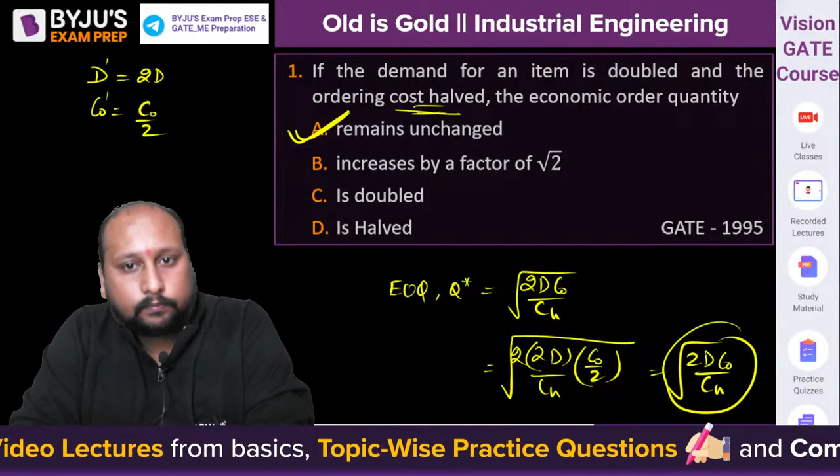It is being written that the ordering cost is being halved, so C0 by 2. Clear? Right, let's move to the next question, question number 2 on the screen.

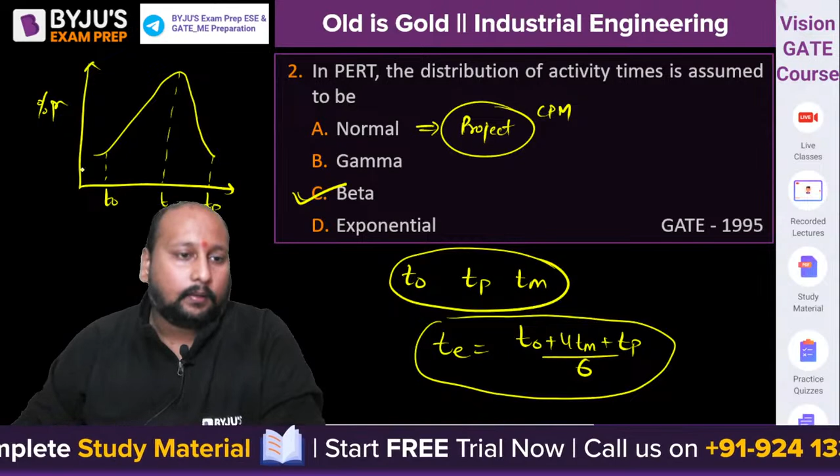Let's move to question number 3 on the screen. A very easy question from your work study module. A stopwatch time study on an operator with a performance rating of 120. So the performance rating or rating factor is given as

1.2. Okay, observed time is basically 2 minutes. That means your observed time is 2 minutes. So allowance is given as 10%, then what is the standard time? What is the standard time?

Very easy question. Calculate the normal time. We know how we can calculate normal time. Normal time is equal to observed time into rating factor, right? We can say normal time is equal to observed time into rating factor. What is observed? 2 into 1.2, that is equal to 2.4.

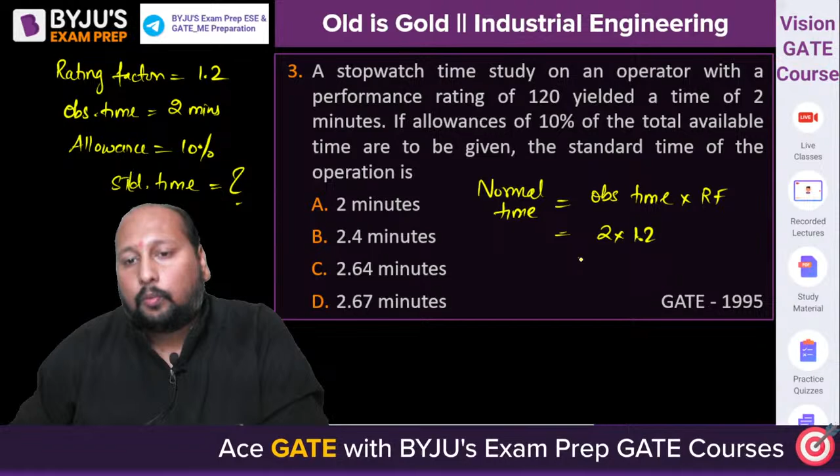Right, now they are asking you the standard time. How can we calculate the standard time? Anyone? Standard time, very good.

Money is going with option B. But 2.4 is the normal time, they are asking the standard time. Standard time is equal to normal time plus 10%, because allowance is 10% of normal time.

So this is equal to 1.1 into normal time, right? So normal time you calculated as how much? 2.4. So standard time is equal to 1.1 into normal time, which is 2.4. So what will this be? 2.4 plus this will be 2.64 minutes.

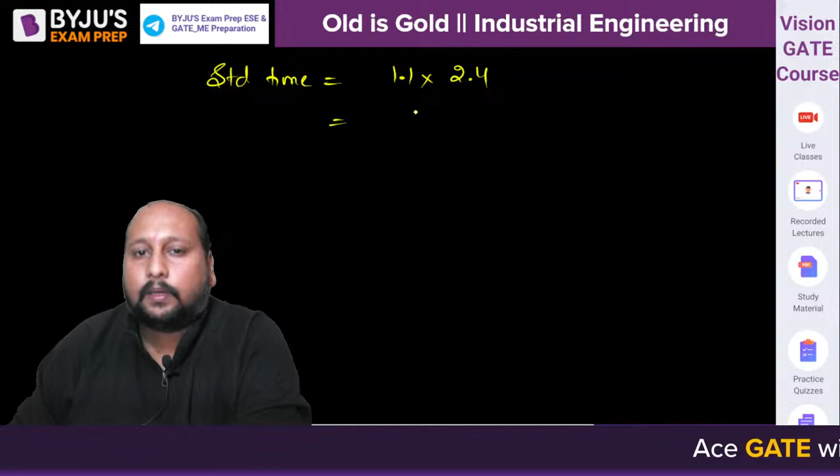2.64 minutes, are we getting 2.64? Option C, very good, Tarini and Money. Absolutely correct. Option C is correct answer.

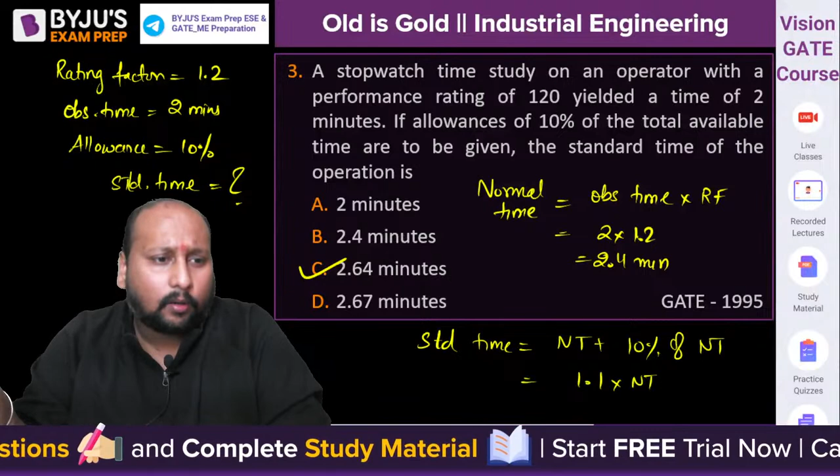Let's move to question number 4 on the screen. From assembly line balancing - in an assembly line balancing of toys, 5 workers are assigned which take times of 10, 8, 6, 9 and 10 minutes respectively. What is the balance delay for the assembly line? Tell me, what is the balance delay for this line?

Option A is 43.5, and they're asking percentage. Okay, quickly - assembly line balancing, cycle time, total work content, remember the formulation: efficiency, 1 minus efficiency is balance delay.

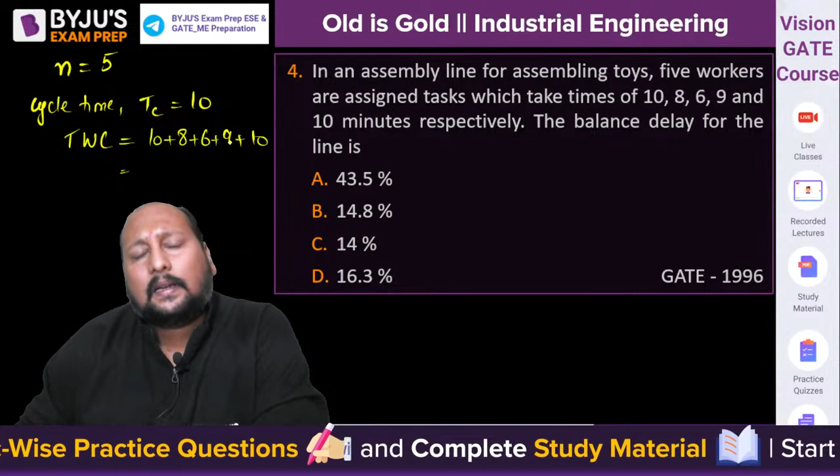Total work content is equal to 10 plus 8 plus 6 plus 9 plus 10. What will this be? 18, 24 plus 9, 33, 43. Okay, 43.

So now we can say the balance delay is equal to 1 minus total work content divided by n into cycle time. So 1 minus 43 divided by 5 into 10, that is 1 minus 43 by 50, which is 0.86. So 1 minus 0.86 is 0.14. Option C, are you getting 14 percentage?

You have to multiply with 100 also, right, because they're asking percentage. So are we getting 14 percentage, everyone? Option C, 14 percentage is the final correct answer. 0.14 comes, so that is 14 percentage, option C. Clear? Very good, very good. Perfect, okay, so always remember that.

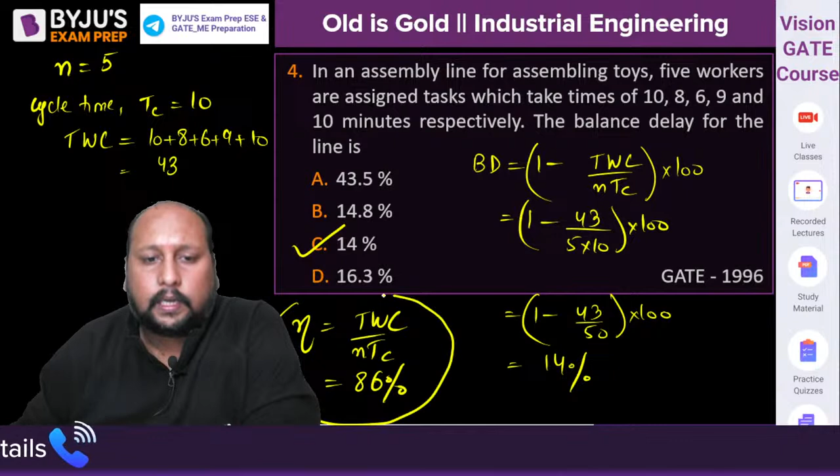And if in the same question they're asking you what is the efficiency, then efficiency is equal to total work content divided by n into TC. That is equal to 86 percentage. Okay? If in examination they ask you the efficiency, you can directly calculate using this particular formulation.

So I always tell you, industrial engineering is a scoring subject, that is my humble request. There are some set of subjects that you need to cover in order to score more by less effort. Which subjects? Heat transfer, industrial engineering, mechanics - 3 subjects, very easy, small subjects, easily able to cover.

Next question. This is from work sampling. Basically initially work sampling was also included in your GATE syllabus, but recently, if I talk about after 2017, they are not asking it. But you never know, if ESE includes it, that is the reason I have taken up this problem.

So they're saying that a preliminary work sampling study shows that the machine was idle 25% of the time based on a sample of 100 observations. The number of observations needed for a confidence level of 95% for an accuracy of plus minus 5% is. Let's calculate. Now here you need to have some understanding of how to calculate the number of observations.

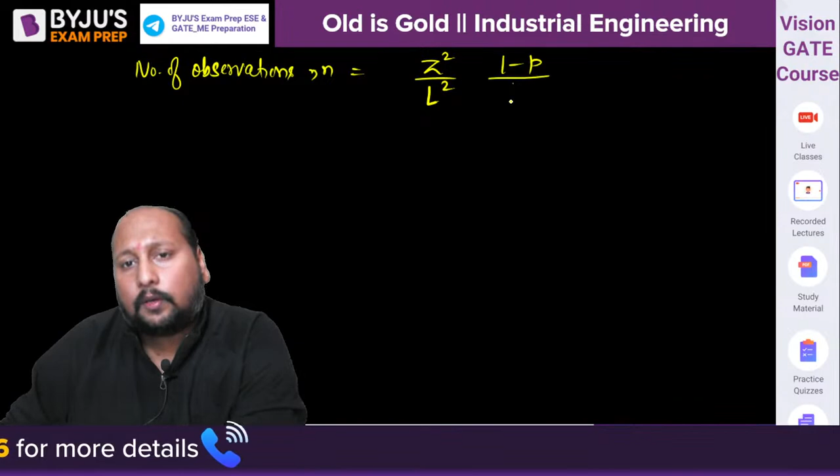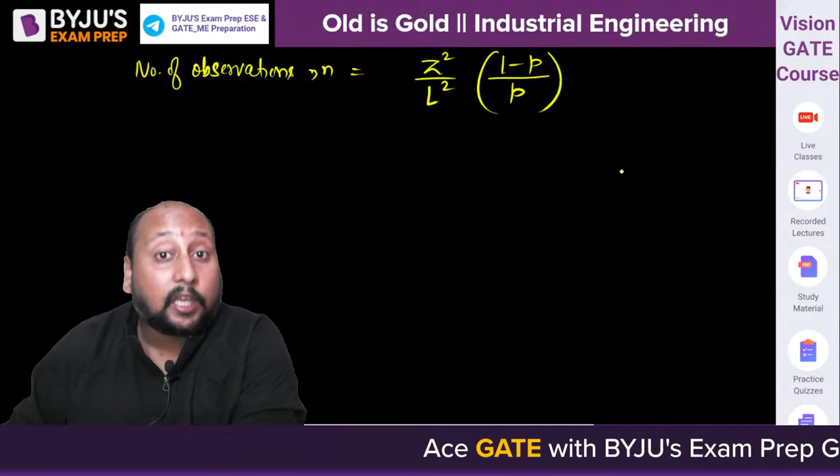I hope everyone knows. If not, you can tell me. Number of observations, how can you calculate? Number of observation for any work sampling is equal to standard normal variate z square divided by accuracy limit L square, times 1 minus fraction of occurrence p, divided by p. Here z is the standard normal variate constant, L is the limit of accuracy, p is the fraction of occurrence. Now here the fraction of occurrence is equal to how much?

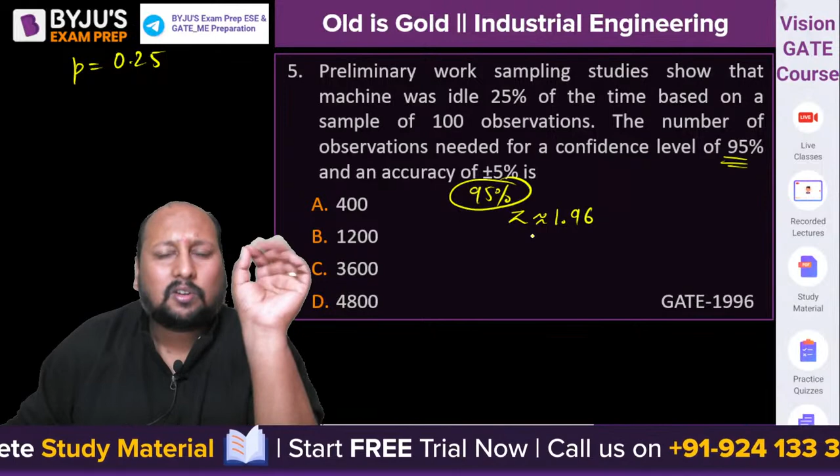25%, that is 0.25. Now for a 95% confidence level, which value of z do we have? We know that z is approximately equal to 1.96. When the confidence level is 95%, the z value is equal to 1.96. Let us take it as approximately 2, because 1.96 we can take as 2, since they are giving the values in integers, right? So we can approximately take it as 2.

L is equal to plus minus 5%, that is 0.05 value. So now we can say this is equal to z is equal to 2 divided by 0.05 whole square, times 1 minus 0.25 divided by 0.25. Can you calculate and tell me what is the nearest value we are getting?

2 divided by 0.05 whole square, 0.75 divided by 0.25. Are you getting exactly 4800? That means to get this kind of accuracy at 95% confidence level, that is your standard normal variate, we need to take 4800 number of observations in the work sampling procedure.

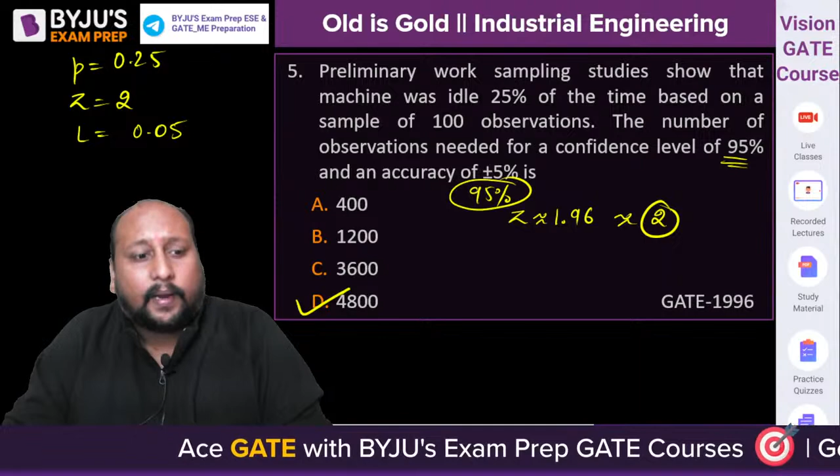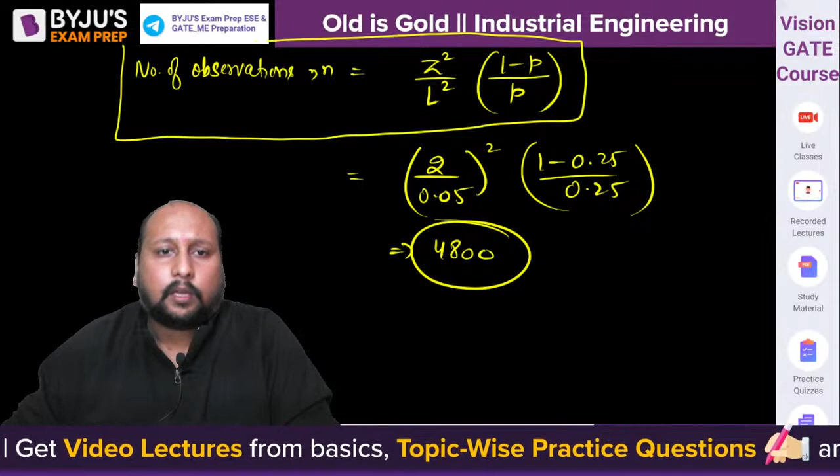GATE used to ask this before, recently in the last 5 years they have not asked, so that might be the reason you won't be able to recall this formula, because we don't frequently use this formulation. So number of observation is equal to z square by L square times 1 minus p upon p. You can use this if they are asking, but okay, you can have a discussion.

So the next question - this type of question is being asked. Now this was a 5 marks problem because earlier GATE had conventional problems, so this is a 5 marks question. A job shop incurs a cost of 60 rupees per day for each day a job is in the shop. At the beginning of the month, there are 5 jobs in the shop with the following data. The processing time and the due date is being given. Which schedule will minimize the total cost? Tell me in which case you'll be having the minimum job flow time.

Minimum job flow time will be observed in which rule, SPT or EDD? If you want minimum total cost, your job flow time should be minimum. SPT will give you the minimum job flow time, and minimum job flow time will definitely result in minimum total cost. So they're not specifying which method to apply, but they've mentioned which schedule will minimize the total cost. That means your answer is SPT rule.

So now we understand SPT rule has to be applied. Now the question is, what is that total minimum cost? Let's try to have a sequence. Quickly tell me what will be the sequence that we'll be getting by using SPT rule.

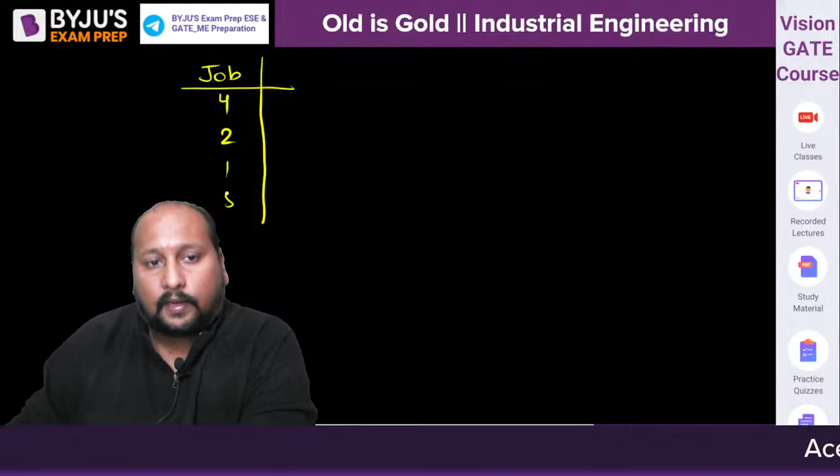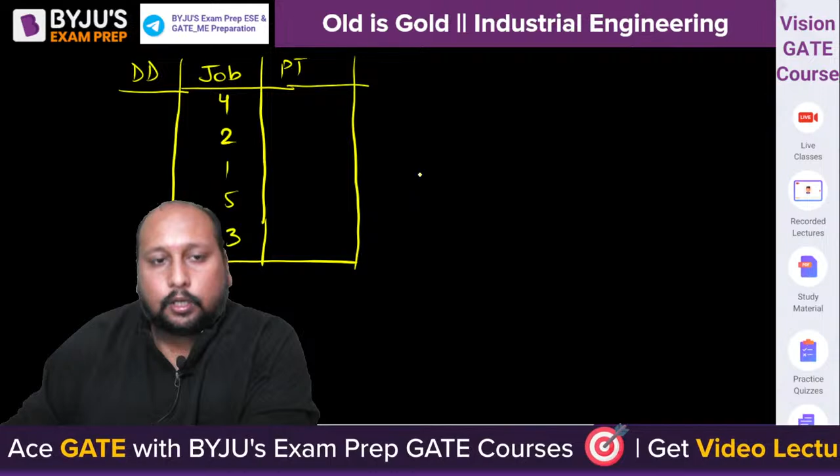Let me write the due date and the processing time along with the number of jobs. Job number 4: 2 and 9. Job number 2: 3 and 12. Job number 1: 5 and 10. Job number 5: 6 and 8. And job number 3: 8 and 20.

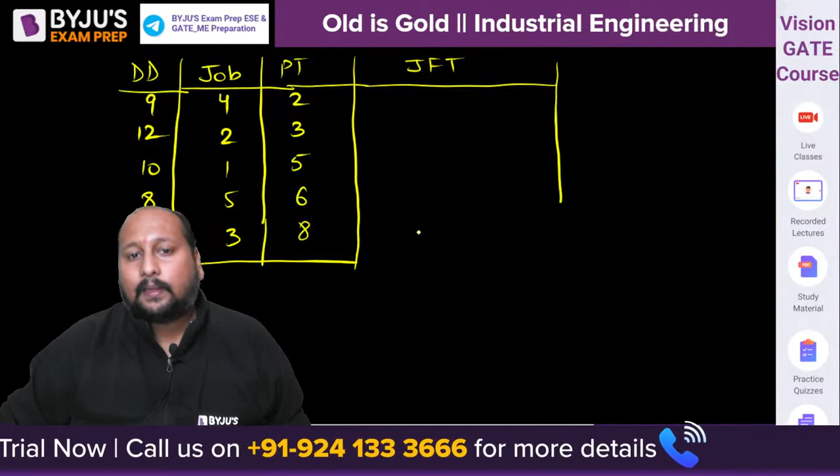So quickly tell me what will be the job flow time for these activities. After that we'll calculate the tardiness or lateness, because they're asking for the tardiness also.

Okay, so we're starting from 0. 0 plus 2 equals 2. 2 plus 3 equals 5. 5 plus 5 equals 10. 10 plus 6 equals 16. And 16 plus 8 equals 24. So tell me, what is the total job flow time? 2 plus 5 is 7, plus 10 is 17, plus 16 is 33, and 33 plus this one will be 57. Are we getting total job flow time as 57?

Now tell me which of the jobs are tardy jobs. Let's start with job number 4, the first one. Is it a tardy job? It is supposed to be completed in 9 days, we are completing in 2 days, not a tardy job. Job 2 is supposed to be completed in 12 days, we complete in 5 days, not a tardy job. Job 1 is supposed to be completed in 10 days, we finish in 10 days, exactly on time, not a tardy job.

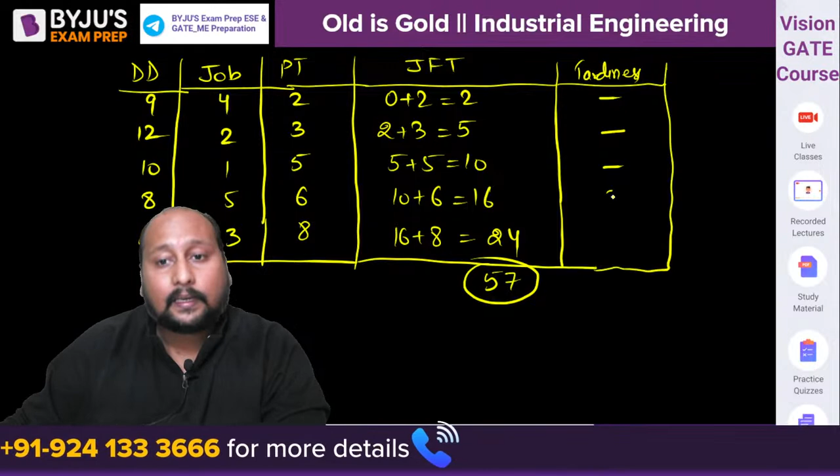Now job number 5 is supposed to be completed in 8 days, but we are completing in 16 days. We have a tardiness of 16 minus 8, that is 8. Next, job number 3 is supposed to be completed in 20 days and we are completing in 24, so 24 minus 20, that is 4. So there are two tardy jobs, job number 5 and job number 3.

So what was asked in the question? What is the total minimum cost? We can say the total cost will be equal to 57, because these are 57 number of days, and per day we have 60 rupees. So 57 into 60 will give you the total minimum cost, which is 3420 rupees.

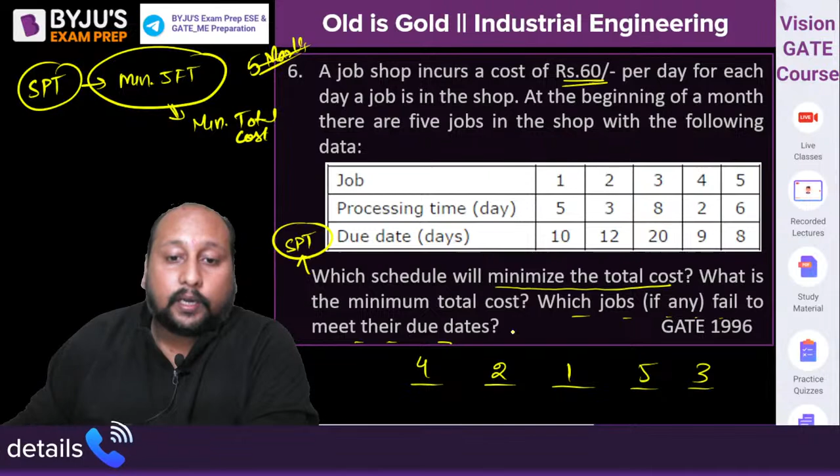Now the second part is, which jobs, if any, fail to meet their due dates? The answer is job number 5 and job number 3. These are the two jobs which are not able to meet their due dates, the rest of the jobs are able to meet their due dates. They're not asking total time, they're only asking which jobs, so you can say 3 and 5.

If they ask for the total tardiness, then we can say 8 plus 4 equals 12, that will be the total tardiness, if they ask in future. If they ask, what will be the average tardiness for this? Anyone?

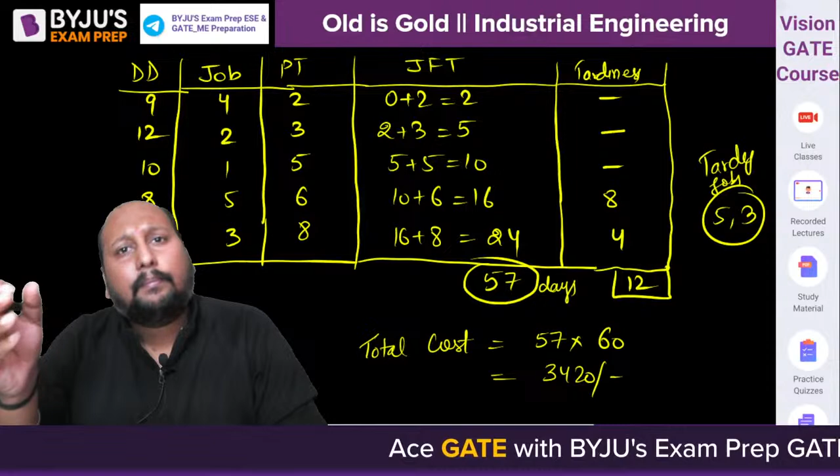What will be average tardiness? That will be the total tardiness divided by the number of jobs. So it will be 12 divided by 5, that is 2.4, which will be the average or mean tardiness. Clear? 2.4. Very good, Rohan.

Next question on the screen. A simple 5 marks conventional problem was asked in the examination. Okay, next question on the screen. Question number 7, very easy.

There's some confusion for many people here, let's try to clarify. Most commonly used criteria for measuring the forecast error. Which of the following criteria do we use to calculate the forecast error? Is it mean absolute deviation, mean absolute percentage of error, or mean square error? Mean standard error isn't even a real thing, so that's eliminated. Okay, anyone else? Which is the most commonly used criteria for measuring the forecast error?

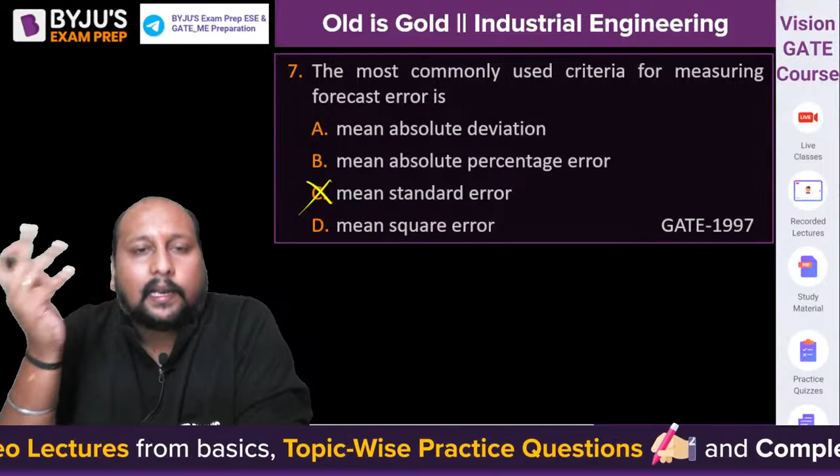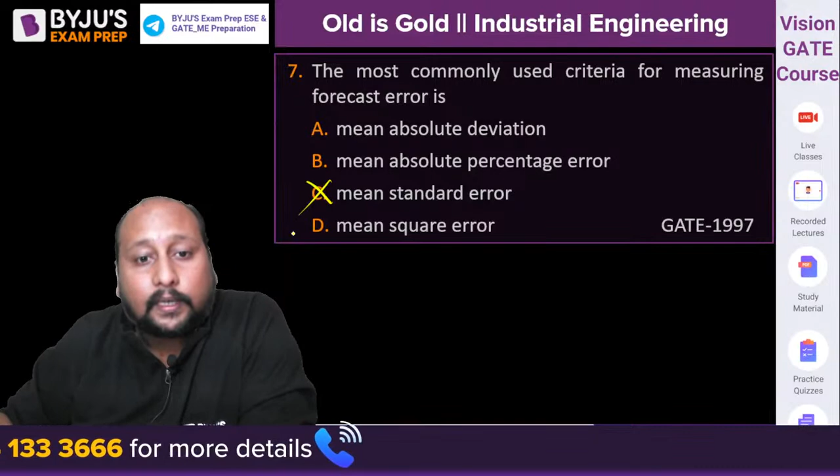There's a bit of confusion here because we study mean absolute deviation as the most common forecast error, but that's not the real scenario. In real life analysis, we always try to calculate the standard deviation. Always remember, whenever you want to calculate the fluctuations in any problem, from a generalized perspective, we always calculate the standard deviation. Which parameter helps us calculate the standard deviation? That is nothing but, very good Tarani, option D, mean square error. Because mean square error helps us calculate the standard deviation, or the fluctuations or uncertainty that will be there.

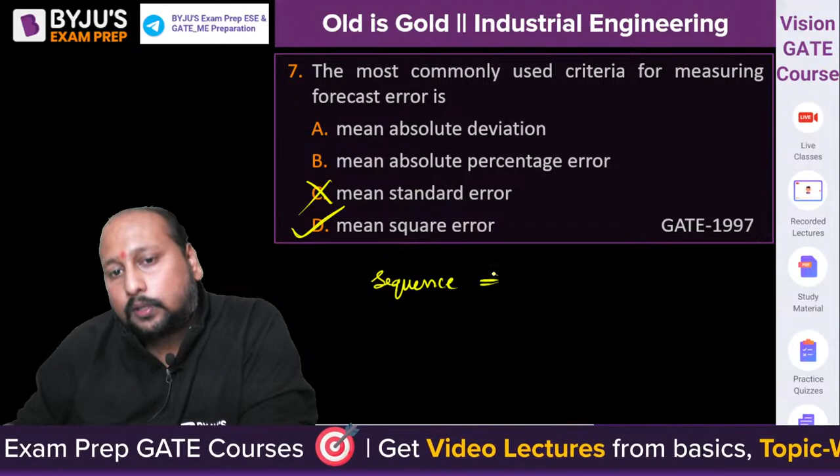So if I want to say what should be the sequence of importance of error, let me tell you, because this will help you going forward. The sequence that should be used: first important is mean square error, then we can go for mean absolute deviation, then mean forecast error, also known as bias. Last one is mean absolute percentage of error. This mean standard error, we can say, is basically talking about bias only. Clear? Option D is the correct answer. Very good, done, next question.

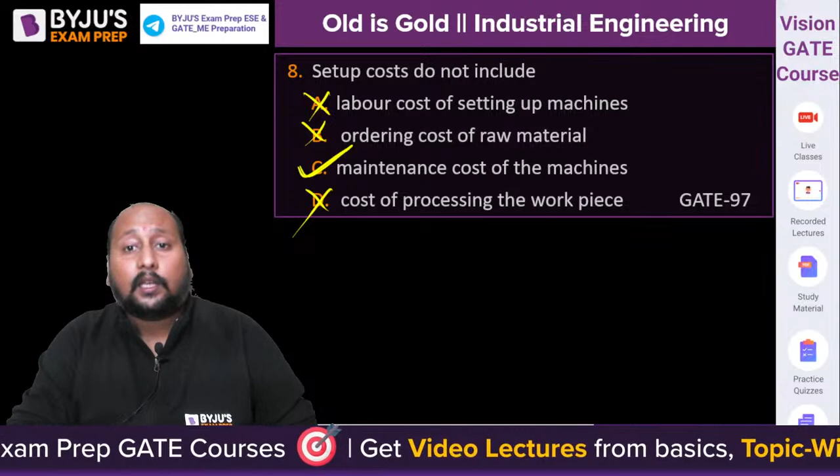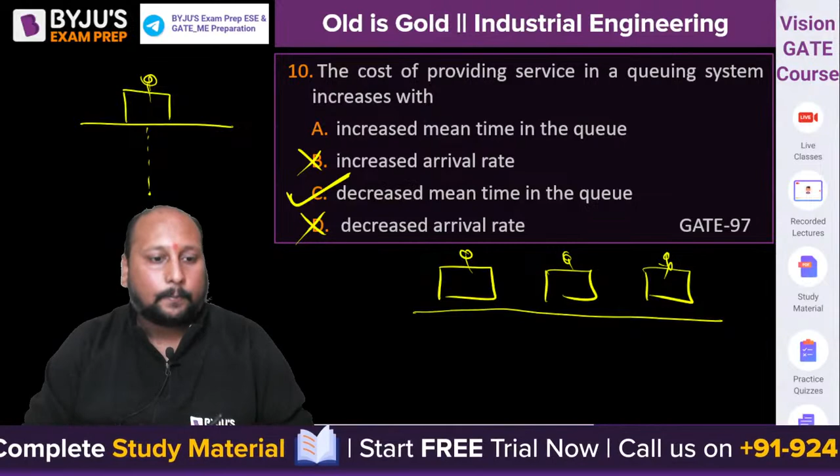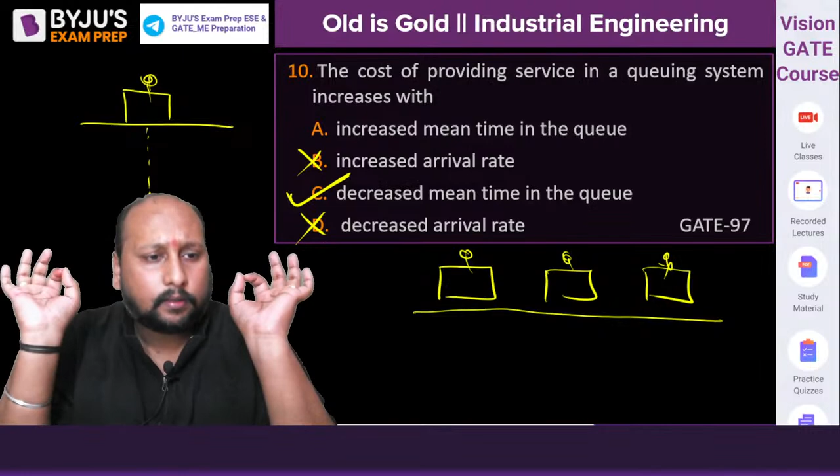Okay, option C is the correct answer. Is this clear? The cost of providing service - let us suppose you are hiring three executives, so definitely the cost of providing service has increased, so the time spent in the queue will be decreasing. Clear? Understood? Look at it from the logic perspective, try to understand the logical perspective, you'll be able to answer these simple questions.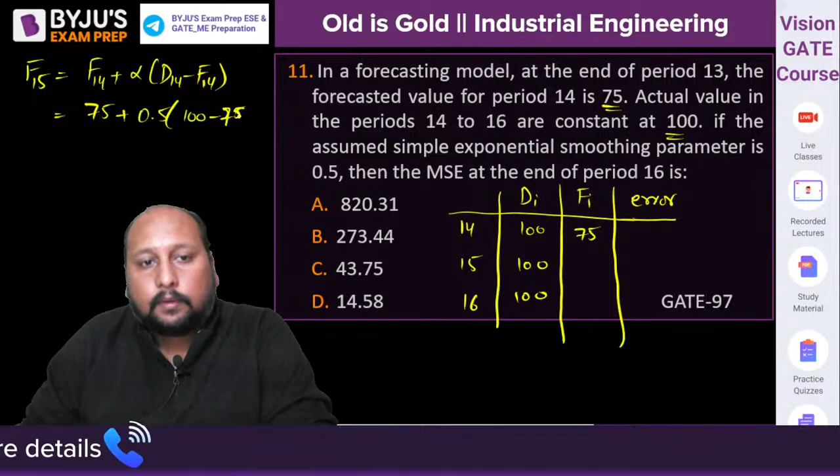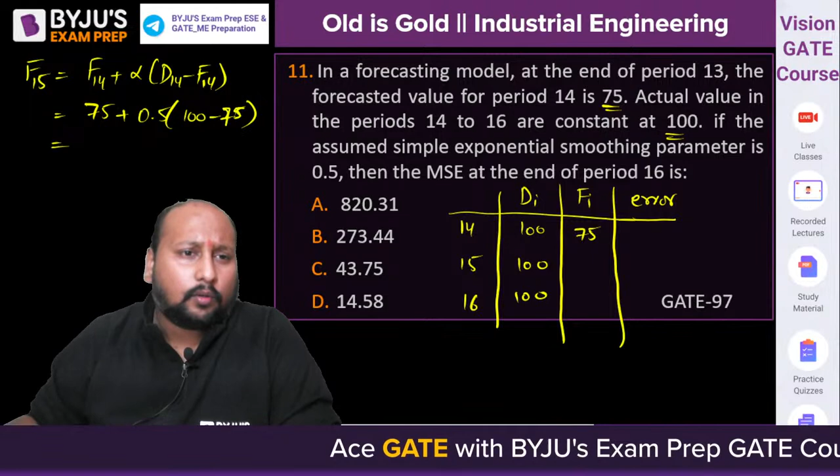So that is coming out to be how much? Help me out with the values. 25 into 0.5 that will be 12.5. So plus 75, that will be 87.5. So we'll be getting over here as

87.5. Next value F16, I'm directly writing the value 87.5 plus 0.5 into 100 minus 87.5. How much is coming? 100 minus answer into 0.5 plus 87.5 equals 93.75. Very good.

93.75. Now let's try to calculate the error. What is error? D minus F, DI minus FI. So 100 minus 75 is 25. This is 12.5, right, 12.5. This is how much?

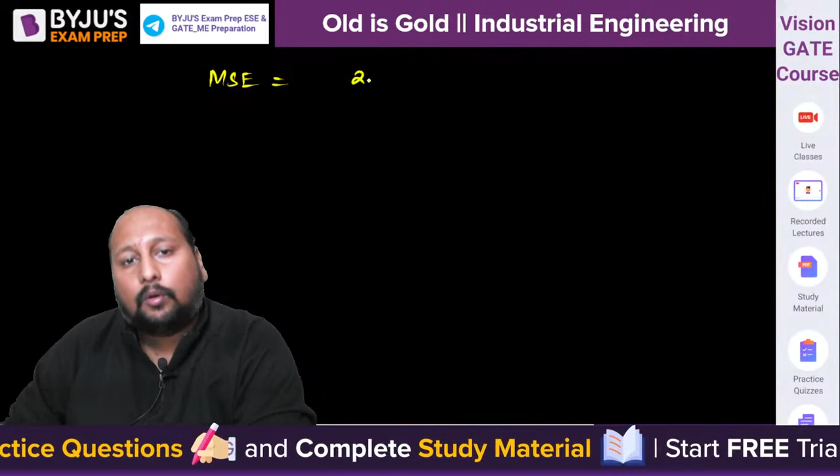6.25. Perfect. What do we need to do for mean square error? Just we have to take the square and take the mean of this. So mean square error will be equal to 25 square plus 12.5 square plus

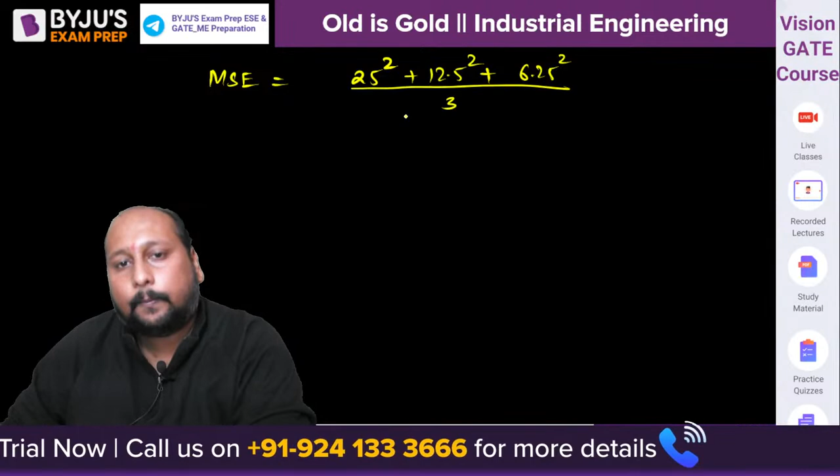6.25 square by 3. What is the value you are getting? Tell me in the comment section what is the final value. Out of A, B, C and D, which is the correct answer? B, sure.

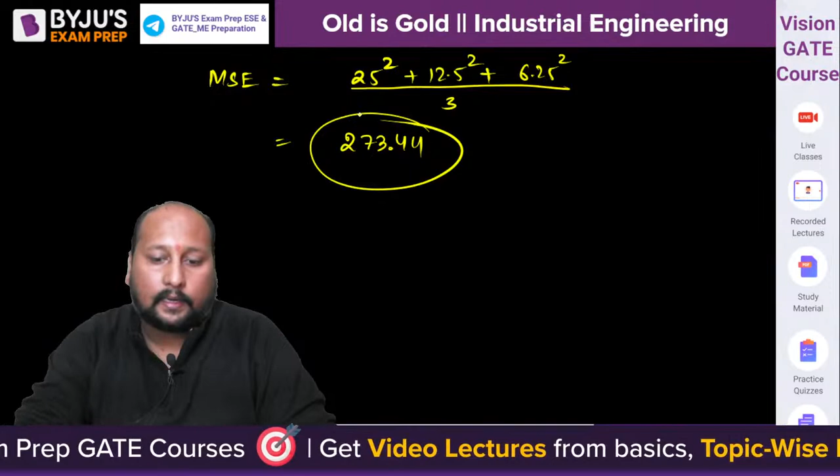273.44, very good. 273.44 is the final correct answer. Very good, right? Option B, 273.44 is the final correct answer. B is the correct answer. Very good, Arnab, Rohan, Tarini, Mani, very good.

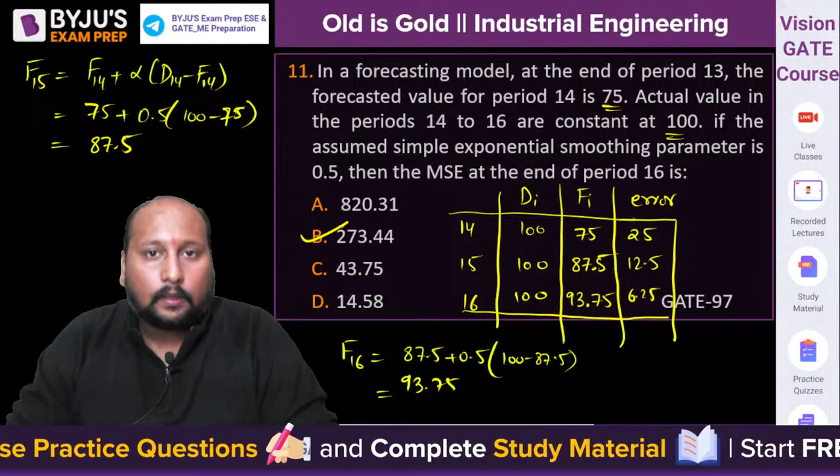Let's go to the next problem. It was a conventional 5 marks question in GATE 97 or 98, one of those. A conventional question was asked from PERT analysis.

If I talk about today's date, the same question is being asked for 2 marks. In that, they won't individually ask you to draw the network diagram. They'll ask what is the minimum time to complete the project, or what is the expected project completion time. So basically today also they have almost the same set of problems, but the way they ask is slightly different.

Let's quickly draw the network diagram, identify the critical path, and tell me what is the estimated project duration.

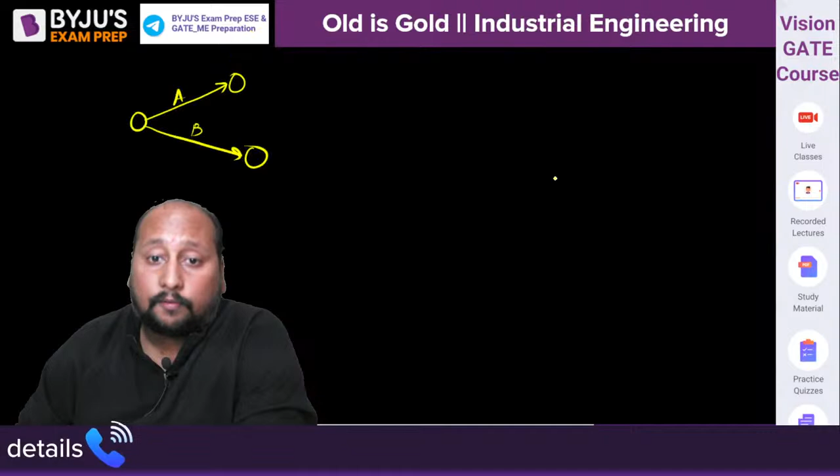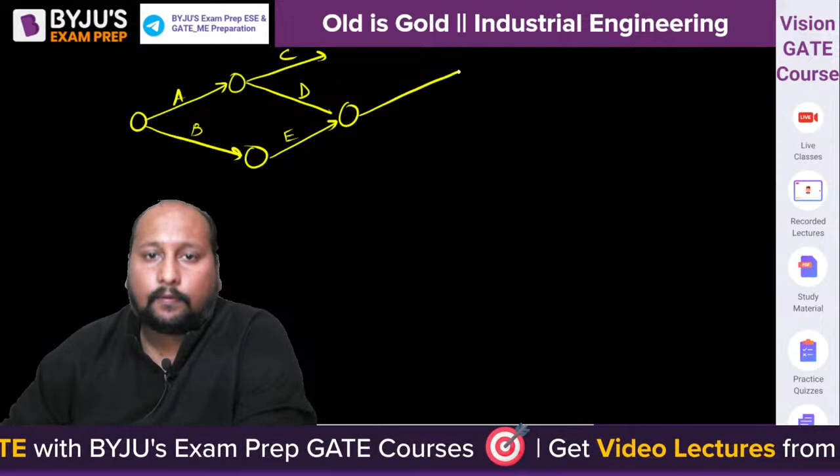Right, so C is having a predecessor of A. D is also having predecessor of A. C is having A and D is having A. E is having B, then D and E is F. D and E is F. And C and F is G.

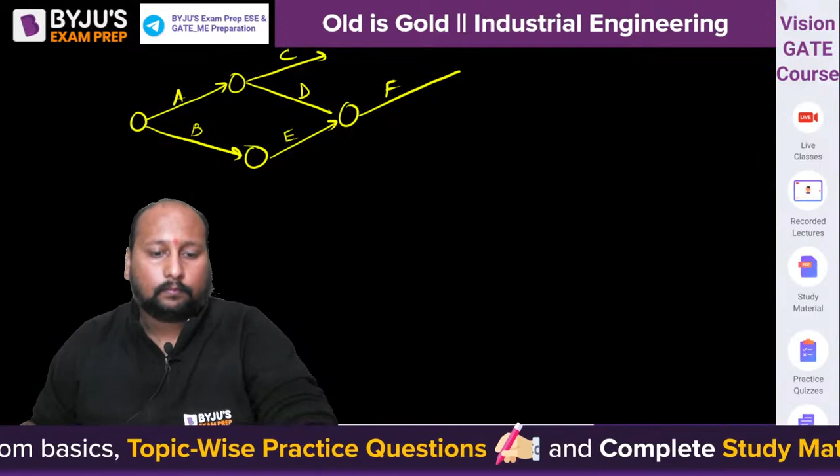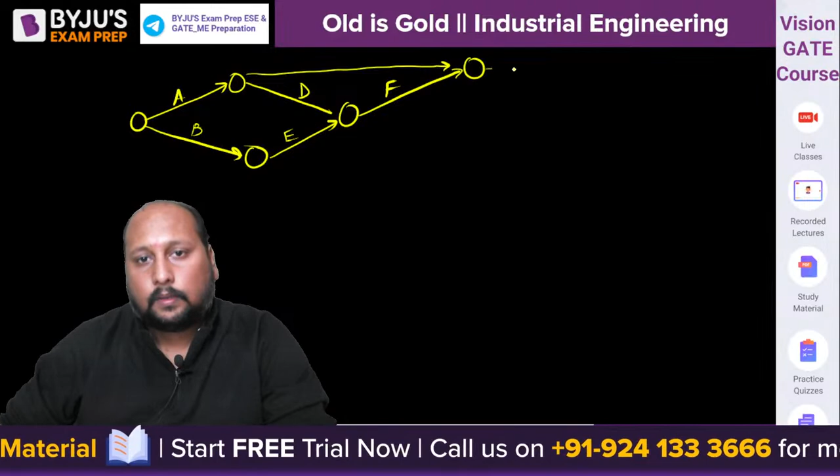So let us try to... then we are having G, right? Please do check - A, D, F, G.

Okay, 21 is the weeks. Very good, very good, correct Rohan. Absolutely correct, 5 marks achieved. Well, that was the thing at that time.

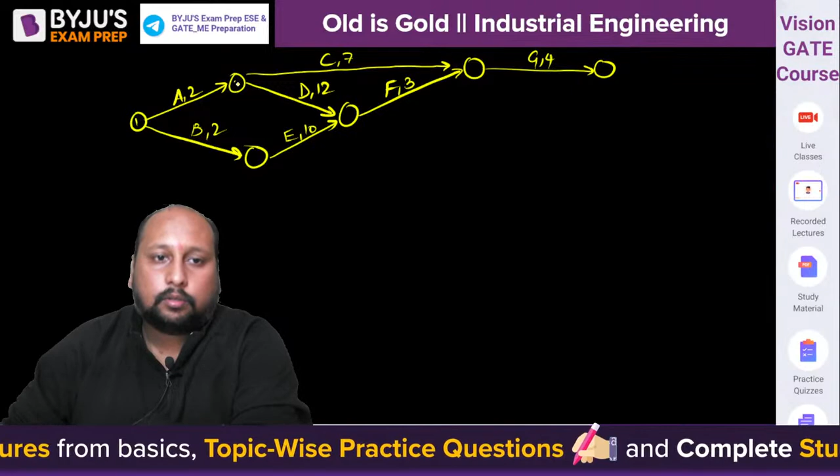So this is A is 2, B is 2. This is C, C is 7. D is 12, E is 10. F is 3 and G is 4. G is 4, right? So 1, 2, 3, 4, 5, 6.

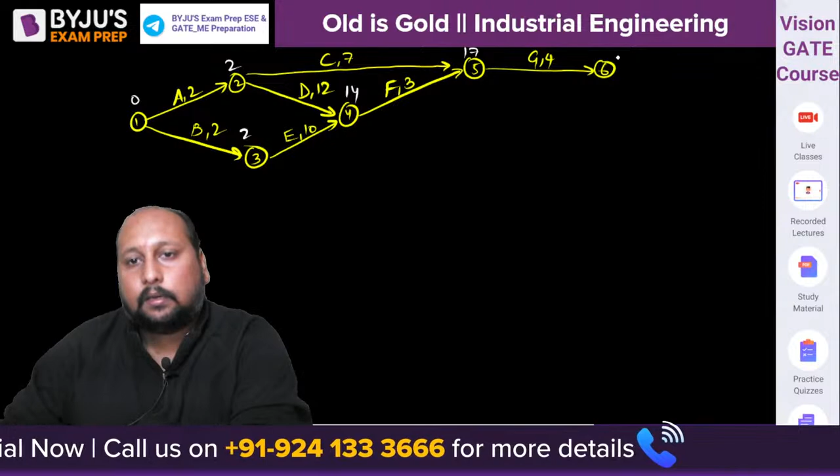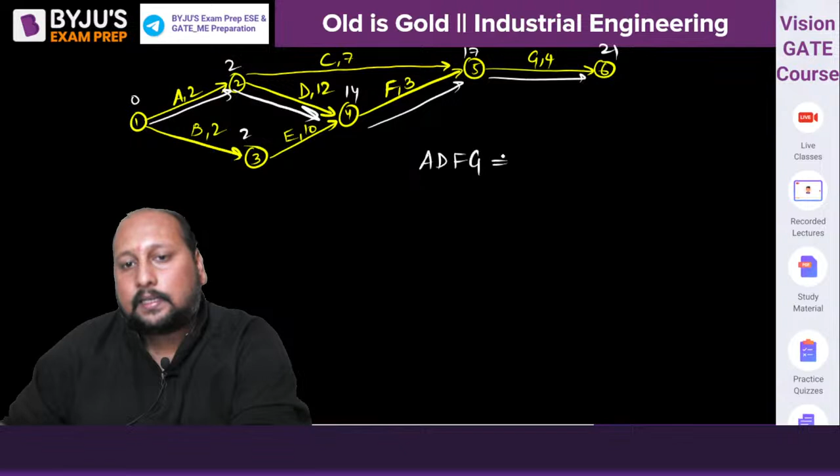Let's identify the network diagram. 0, 2, 2, 2 plus 10 is 12. This is 14, 17, 21. So critical path is this one - A, D, F, G. So A, D, F, G is the critical path, right?

And the minimum time to complete the project is 21 weeks. 21 weeks is the minimum time to complete. So no option given for this.

Okay, so we have covered both parts here. We have constructed the PERT network, we have identified the critical path, and we have estimated the project duration, which comes out to be 21 weeks. Clear? Done.

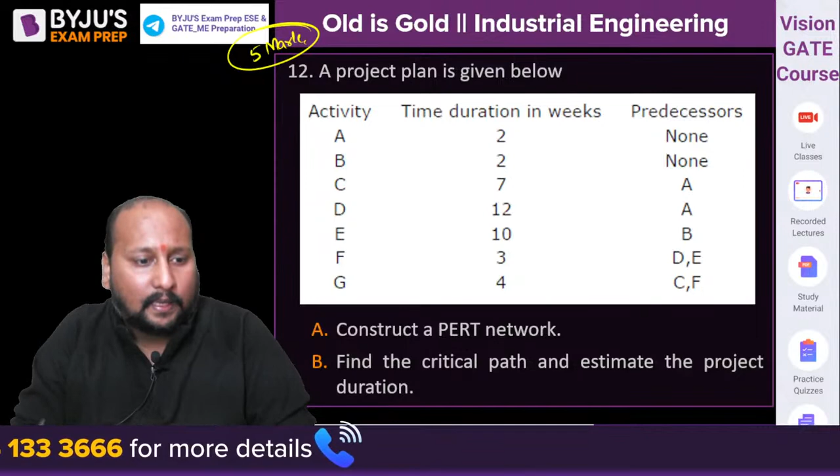This is also a 5 marks question. Isme 5 parts pooche the from the queuing model. There are 5 subdivisions, they are asking one by one. So I think by solving this question, you are almost, we can say, 70 or 80% of the queuing model is completed. People arrive at a hotel in a Poisson distribution at arrival rate of 8 per hour.

Lambda is equal to 8 per hour. And the service time distribution is closely approximated by negative exponential. The average service time is 5 minutes. So service time is equal to 5 minutes.

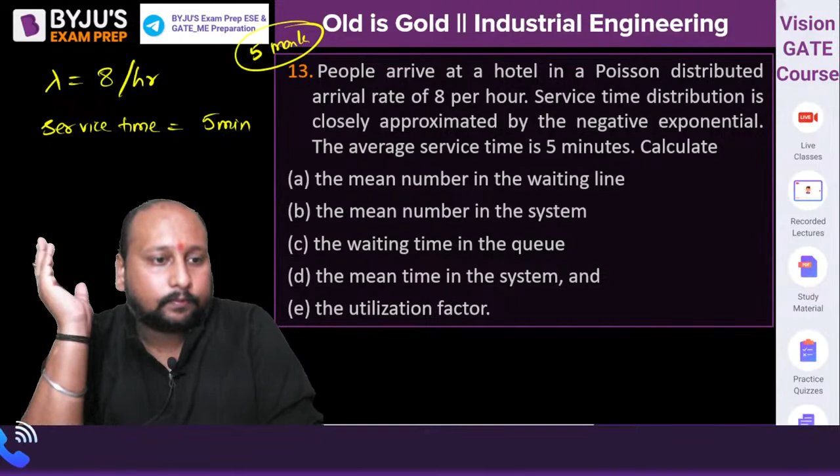5 minutes, right? So can you tell me what will be the service rate? That means for serving you are taking 5 minutes, right? So how many customers will you be able to serve in 1 hour? Because the arrival rate is 8 customers arriving per hour. So can we say the service rate will be equal to 60 by 5, that is 12 per hour.

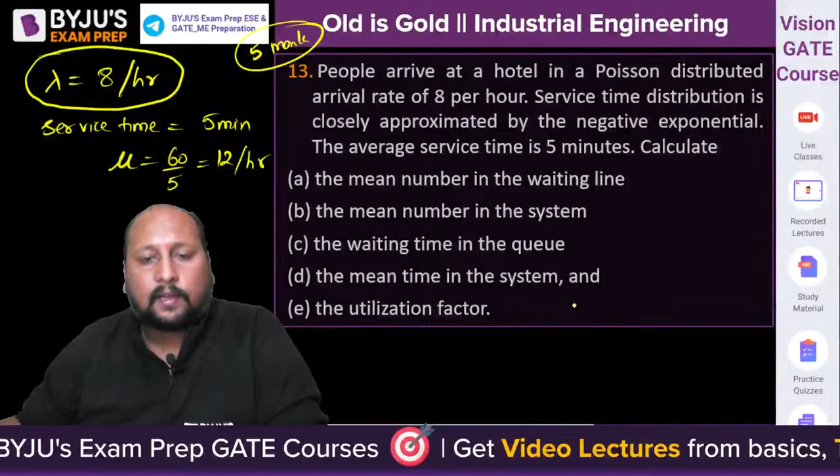Very good. So lambda and mu we have calculated. Once you have calculated both of these values, let's calculate the rho value. Rho is equal to lambda by mu, that is equal to 8 by 12, that is 2 by 3 or 0.67. So the E part is 0.67. This is nothing but the utilization factor, right?

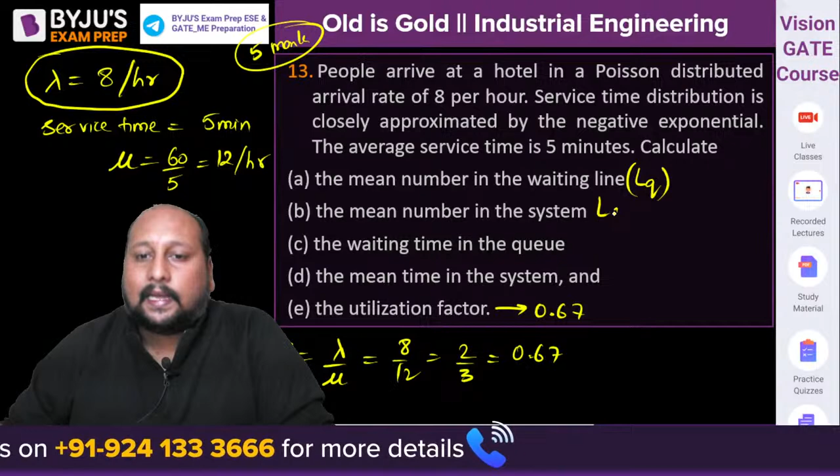Now they're asking you, what is the mean number in the waiting line, what's the mean number in the system. So this is nothing but LQ, this is nothing but LS, mean wait time in the queue is WQ, mean wait time in the system is WS. Chaliye, bahut badhiya.

You can calculate LQ, LS with a simple formulation, and tell me what is the answer. Let's start with length of the system, that is equal to rho upon 1 minus rho. Rho kitna hai? That is 2 by 3. 2 by 3 divided by 1 minus 2 by 3, that is coming out to be 2. So the answer is 2, right?

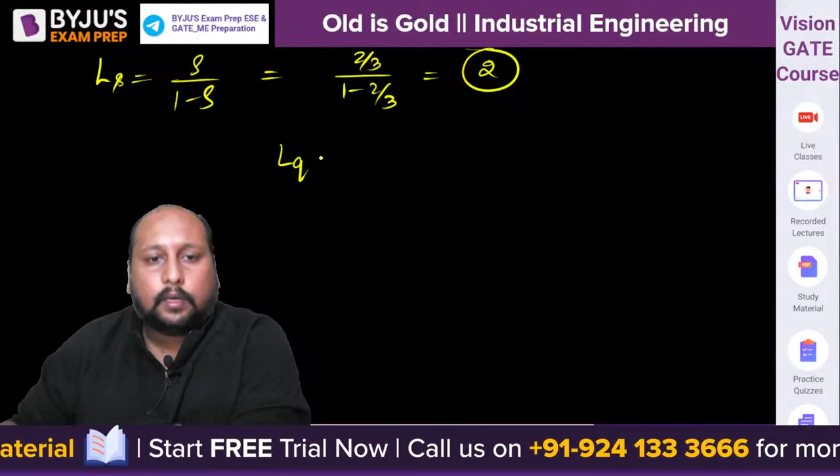Let's calculate the mean number in the waiting line. So LQ is equal to rho square upon 1 minus rho, that is 2 by 3 whole square upon 1 minus 2 by 3. So this is coming out to be 4 by 3, or 1.333. So for this we are getting 1.333 as the answer.

LQ. Perfect. What is the waiting time of the system? Waiting time of the system is equal to, we can use Little's law, that is length of the system by the arrival rate. So length of the system is given as 2, arrival rate is already given, that is 8. So 2 by 8, this is 1 by 4 hours.

Are they mentioning anything about the units? They are not mentioning any units. So we can say 1 by 4 hour or 0.25 hours. If I want to calculate in minutes, we can say 60 by 4, that will be equal to 15 minutes. We can say it like this also, right?

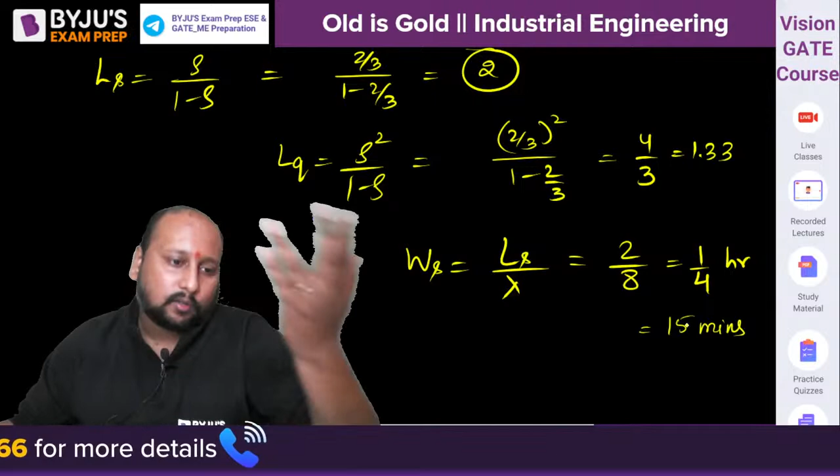The last one, waiting time of the queue. Waiting time of the queue is equal to LQ by lambda. LQ by lambda, right? So LQ is how much? LQ is 4 by 3. 4 by 3 divided by lambda, which is 8. So this is equal to 1 by 6 hours. Or if I want to convert this into minutes, we can say 1 by 6, 60 by 6, that is 10 minutes will be the answer.

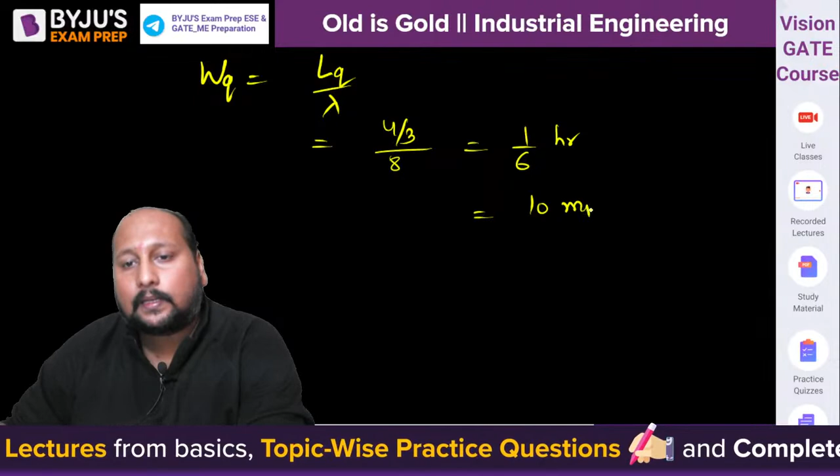Right? Clear? So this way we have calculated all 5 parts. WQ is coming out to be 1 by 6 hour. WS is coming out to be 1 by 4 hour. If they're asking in hours, you can calculate in hours. If they're asking in minutes, you can convert this into minutes, and from there you can get the final correct answer.

Okay, done, clear, all the 5 parts, and hardly you took 2 to 3 minutes to complete this problem. Okay fine, chaliye, question number 14 on the screen.

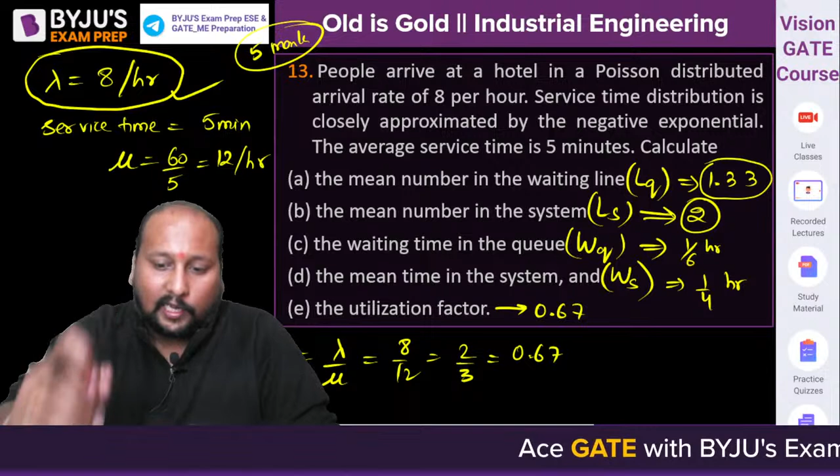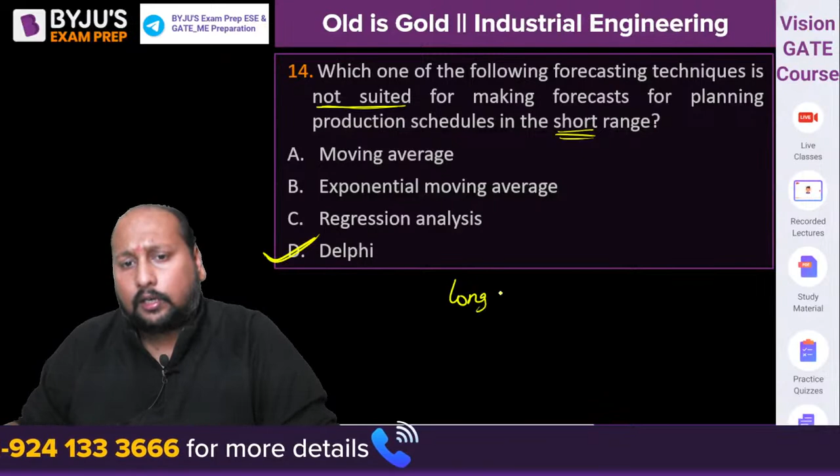Which one? Option D, no doubt in this, option D is the correct answer, because the Delphi technique is being used for long range forecasting. We can say for long range forecasting, we are using the Delphi technique.

Achha, apart from the Delphi technique, is there any other technique that we use for long range forecasting? Can you tell me in the comment section? Can we go for market survey? We can go for market survey. We can go for market trial.

Or we can go for the Delphi technique, market survey, or market trial. Now for short range forecasting, we use simple moving average, weighted moving average, and the exponential moving method. We can also use regression analysis as different forecasting techniques for this.

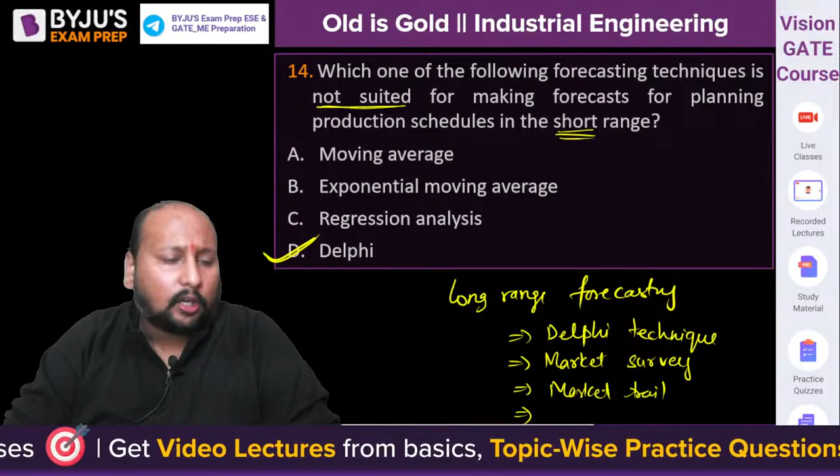There are approximately 7 to 8 number of different types of long range forecasting techniques. Is this clear? Let's move to the next question on the screen.

At a production machine, parts arrive according to a Poisson process at a rate of 0.35, so lambda equals 0.35 parts per minute. The processing time for the parts has an exponential distribution with a mean of 2 minutes, so the service time is 2 minutes per part. So what will be the service rate? We can say 1 by 2, or 0.5 parts per minute.

Now, what is the probability that a random part arrives and finds that there are already 8 parts in the system—meaning the machine and queue collectively? What is the probability of having exactly n number of parts in the system? It is equal to rho to the power n into 1 minus rho.

Here rho is equal to what? You can calculate with n equals 8, place it and tell me the final answer. We can say rho is equal to lambda by mu, which is 0.35 by 0.5. Quickly, can we say this is equal to 0.7? Yes, this is equal to 0.7.

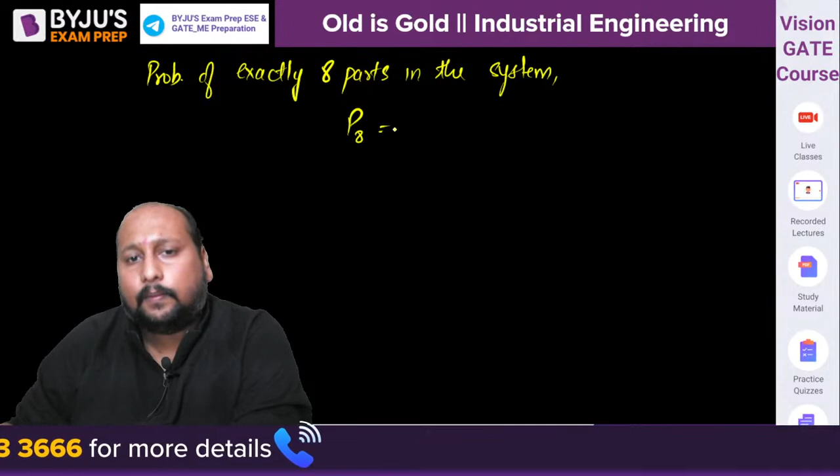So we can say the probability of exactly 8 parts in the system, that is P8, will be equal to rho to the power 8 into 1 minus rho. So rho value is 0.7, giving 0.7 to the power 8 into 1 minus 0.7. What is the value we are getting? Option A, B, C or D? What is the nearest value?

8 into 0.3. I think it's 0.0173, option C. From the calculator, we are getting exactly 0.01729. Exactly, option C is the correct answer. Very good, option C is correct. 0.0173 is the final correct answer.

Very good. Last question on the screen is from break-even analysis, which was asked for 2 marks in your GATE paper. A conventional lathe and a CNC lathe are under consideration for machining a given part, and the relevant data are shown below. Interestingly, the same question was asked in one of the PSU exams, where they asked that if manufacturing 100 units, which one is economical. But here they are asking what is the break-even quantity.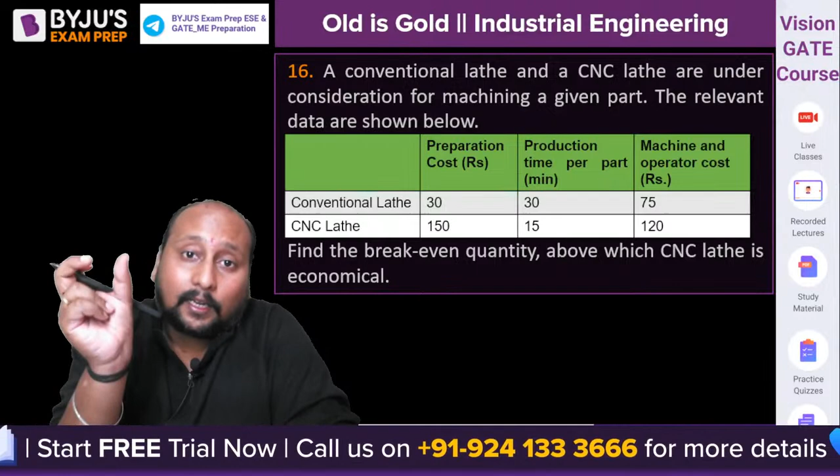Quickly tell me the answer. They are asking that the total cost for the conventional lathe will be exactly equal to the total cost for the CNC lathe at a particular production level—that is the break-even quantity. Initially the conventional lathe will be cheaper, but after some production level the CNC lathe becomes economical. So they are asking for that break-even point.

There is no option for this, so you have to tell me the final answer directly: at what quantity are you getting the break-even? So let us talk about the conventional lathe.

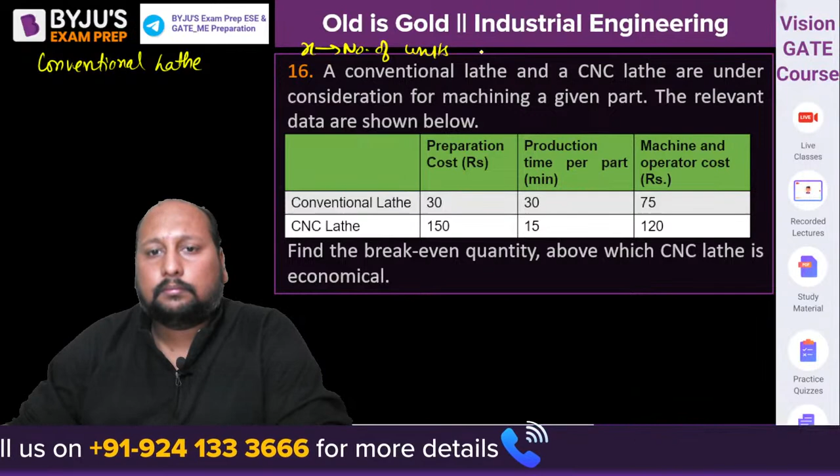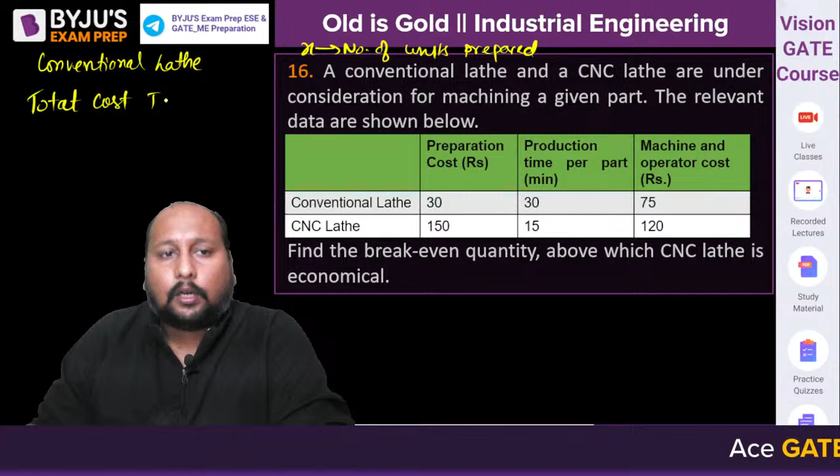For the conventional lathe machine, let us suppose we are manufacturing X units—X is the number of units being manufactured. So what will be the total cost of the conventional lathe? That will be equal to 30 rupees preparation cost, plus 30 minutes production time, so 30 by 60 into 75 rupees per hour, into X units manufactured. This is the total cost for manufacturing X units from the conventional lathe.

Similarly, the total cost for the CNC machine will be equal to 150 plus 15 by 60 into 120 into x. Let us try to solve it: 150 plus this gives 30x... this will be 30 plus 1 by 2, which is 37.5x. So we can say at the break-even point, the total cost of the conventional lathe machine will be exactly equal to the total cost of the CNC lathe.

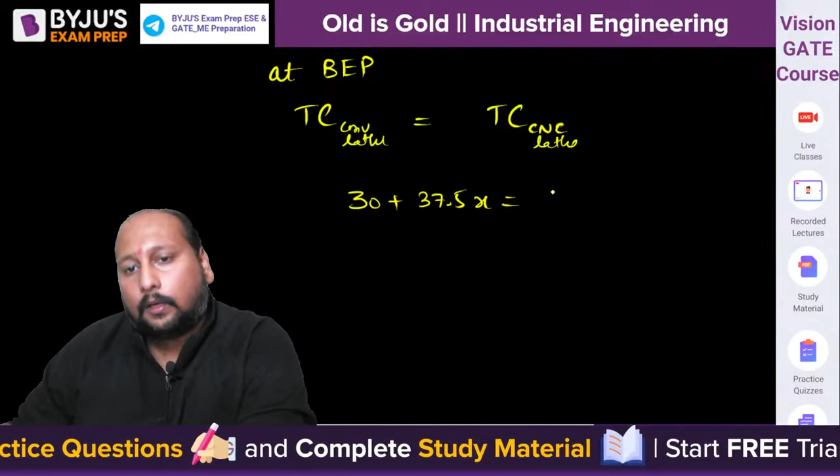So the total cost of conventional is equal to 30 plus 37.5x, which is equal to 150 plus 30x. Let us calculate the value of x, and that is the break even point.

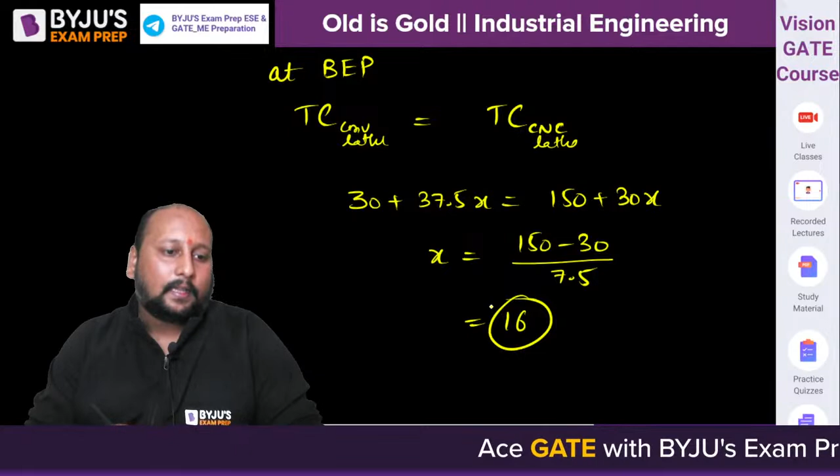So this is 150 minus 30 divided by 7.5. What value are we getting? Are we getting exactly 11? No, we are not getting 11, we are getting 16. Yes, 16.

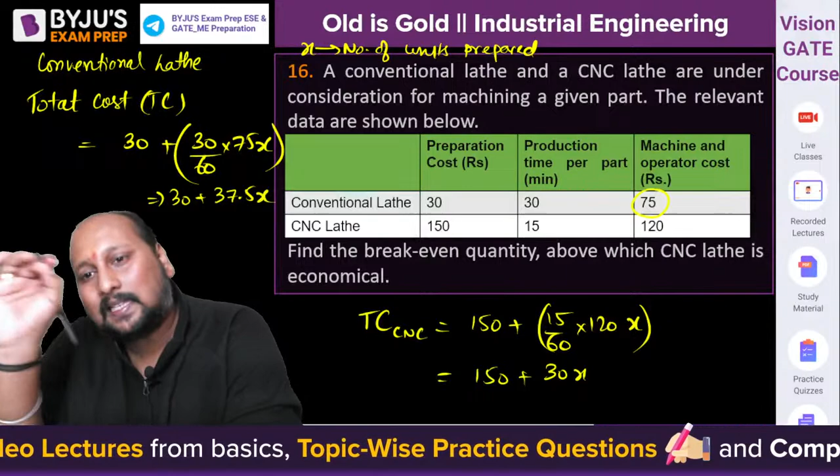So we can say at exactly 16, your total cost with conventional lathe will be exactly equal to the total cost with CNC lathe. So 16 number of units will be the break even point.

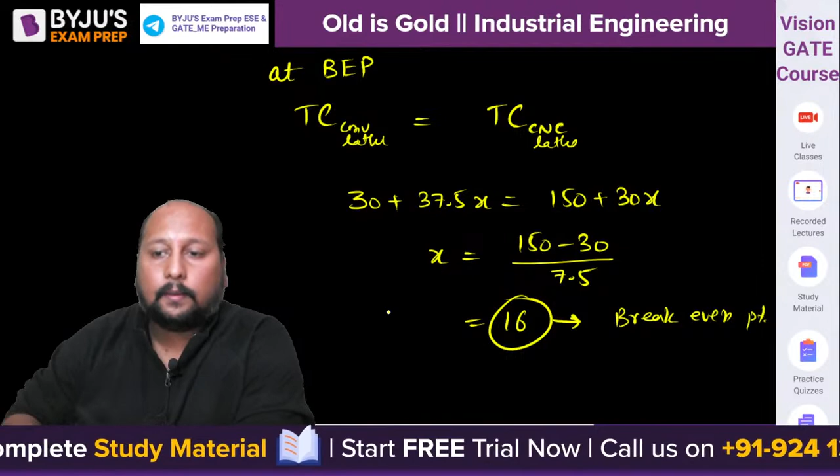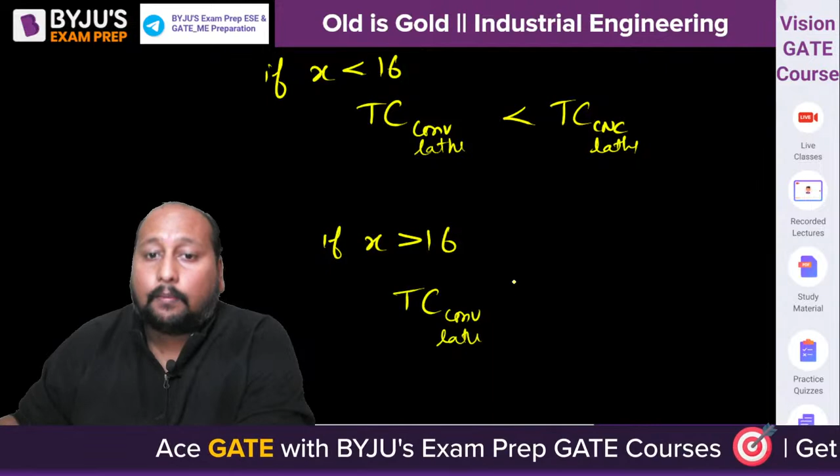Break even point. That means we can say if x is less than 16, then total cost for conventional lathe will be less than that of total cost of CNC lathe. And if x is greater than 16, then the total cost of conventional lathe will be more than that of total cost of CNC lathe machine.

Is this clear? They're asking you about this break even, so the answer for this is 16. The 16 units is the final correct answer. Understood? Rohan, I think that is clear.

11, we are not getting 11. You can have a look on any value. If any doubt, you can tell me.

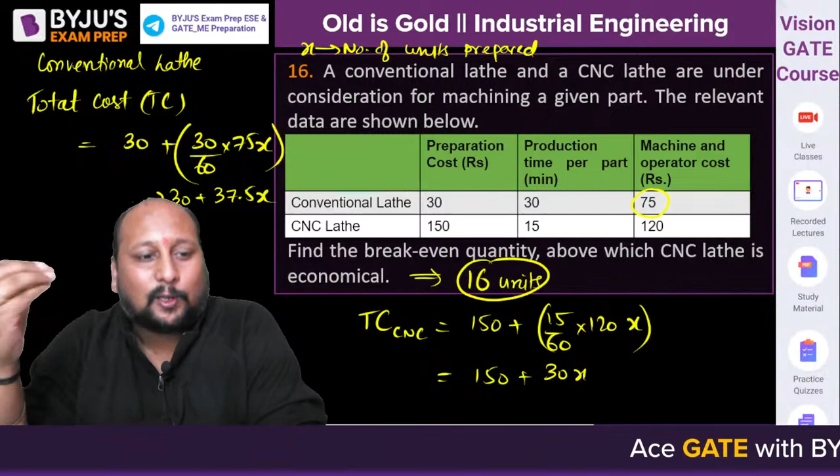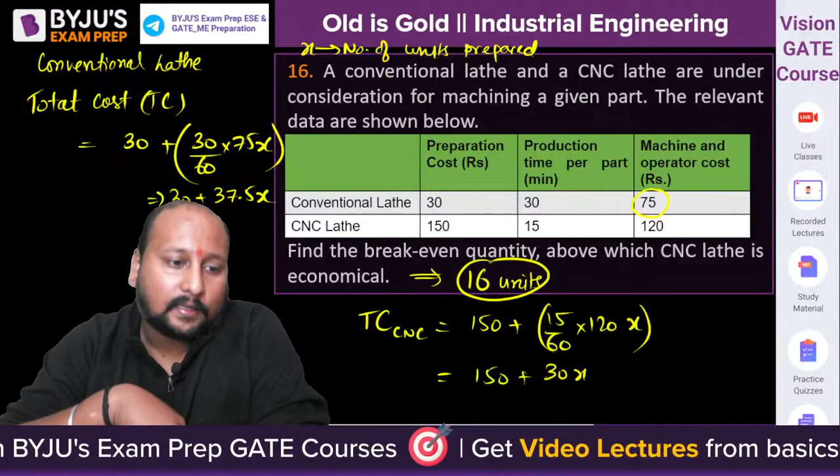All clear? Done? So these are some set of questions which is being asked in PSUs. There were some repeated questions, so I'm not taking those repeated questions, and some very easy problems are also included in today's session. I tried to take some unique type of question which is being repeated in some PSUs also, right? So it's very important you try to have a better understanding. So this is it from my side from this module called industrial engineering, and definitely tomorrow Chandra sir, then day after tomorrow Vipin sir, then I'll be coming up with engineering mechanics with you guys.